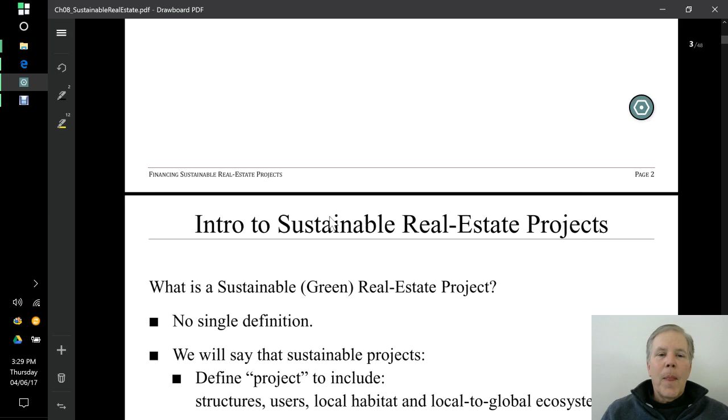First thing to know is that sustainable and green are synonymous. So what do we mean by a sustainable or green real estate project? Well, like many things in this life, there is no single definition. What we will say for the purposes of this chapter is that sustainable projects are defined to include structures themselves, users, local habitat, and local to even global ecosystem around our project.

Also, sustainable projects are going to consider not just economic issues, but also environmental and human health impacts of our project. And we want to measure all of these things over the project's entire life cycle, and that means design, build, manage, recycle. And then finally, green projects are defined to include aiming to achieve environmental and human health benefits while remaining economically competitive.

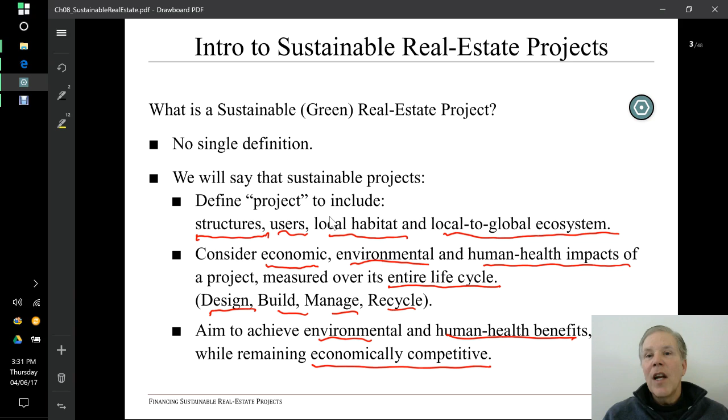Clearly, this is a much broader definition of what a real estate project is than anything we have encountered to date, and it's a much broader definition of a real estate project than has been traditionally considered in the industry.

So let's compare and contrast traditional to sustainable projects. If we look by project stage, which we often do, and we compare objectives for traditional projects and sustainable projects, we find in the design build phase, what's traditionally been looked at is trying to provide a great structure and minimize our construction cost.

From a sustainable or green perspective, the aim is still to provide a great structure, but now to contain life cycle costs while remaining economically viable, optimizing our environmental impact, and maximizing user health and comfort.

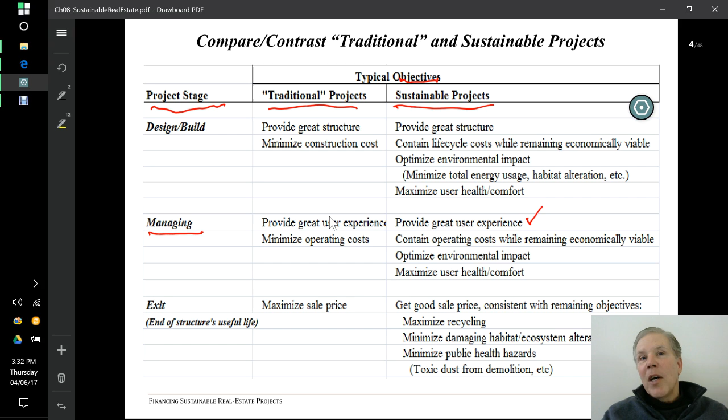Similarly, with managing of the project or operating a cash flow producing property, traditionally we've been looking at providing great user experience and minimizing our operating costs so we can maximize our NOI, et cetera. So we want to do the same thing from a green perspective in terms of user experience. But instead of minimizing operating costs, we're looking to contain operating costs while remaining viable economically. We want to optimize our environmental impact and maximize, again, user health and comfort.

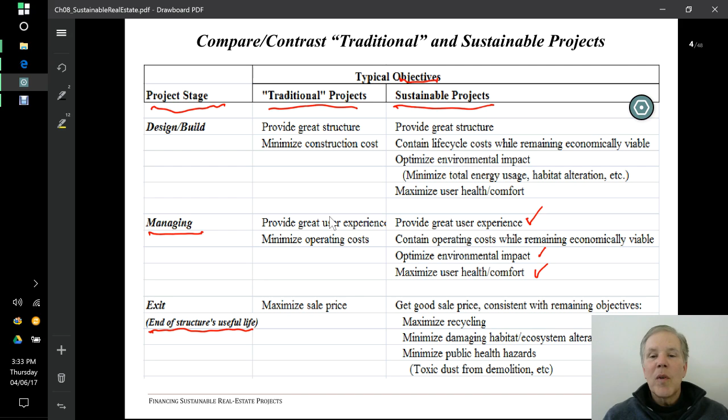And then finally, at our exit stage, which will be the recycling or disposal stage of the structure, we're aiming to maximize our sales price, what we can get for the land, the building, if it's going to be repurposed, etc. From a green perspective, that typically changes to something like get a good sale price consistent with our other important green objectives.

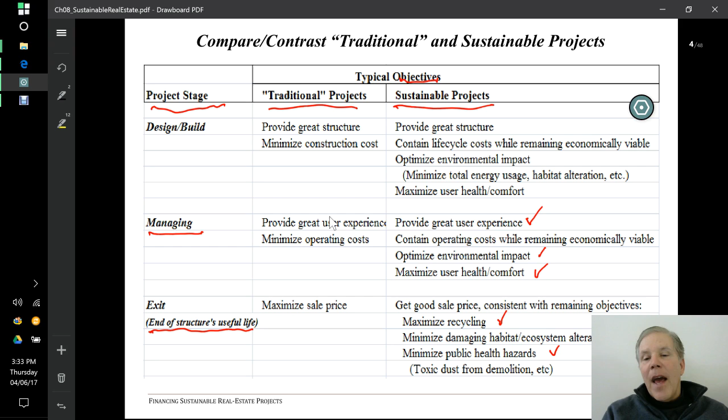Which are to maximize recycling, minimize damage to habitat around the building and the ecosystem around the building, minimize public health hazards that, as we all know, can happen from demolition, et cetera. So we have a lot more going on with green projects than we had with traditional projects.

The assumptions of sustainable projects are worth talking about. Underlying assumptions to green projects are that they should contribute to the public good. That's why we're not just maximizing our NOI, minimizing costs, et cetera. Also, that the public good is furthered by minimizing total energy use, minimizing habitat alteration, et cetera. And we don't accept the unquestioned preeminence of profit maximization. So it's a very, very different kind of perspective.

The implications of this is that doing green buildings is going to be much more complicated than doing traditional projects. It's going to consider much more than a project's economics. It's going to involve significantly more constituencies and design specialties, as we'll see. And it may or may not have compelling free market economics, which may not matter too much if you're a city building a city hall building.

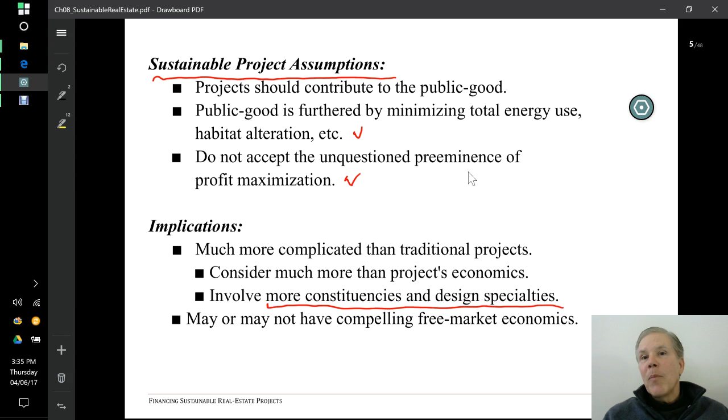You're very interested in the public good, much more so in some ways than the particular economics of building and operating a structure. An interesting feature of many sustainable projects is that free market economics over the life cycle of the project may be compelling, even for privately done green projects.

Usually our upfront costs, design build costs, development costs are going to be higher than they would be with a traditional project, but this may be more than offset by lowered operating costs from things like energy savings, reduced water bills, reduced electric bills, et cetera, and getting higher rents from better worker health and productivity.

We'll look at some data on that farther on. And also getting higher rents from simply the prestige of saying you have a state-of-the-art green design building.

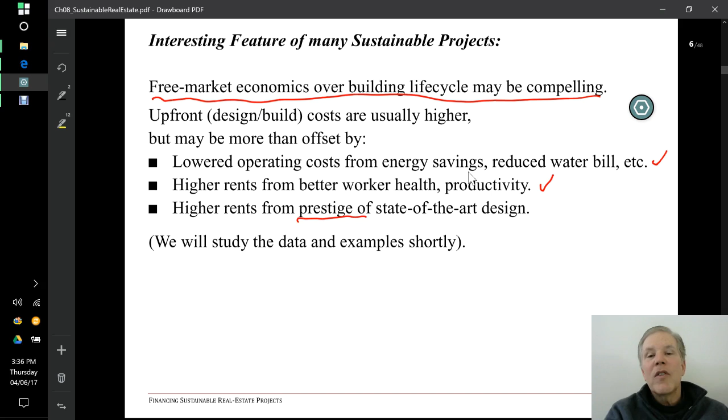So what projects are a good fit for a sustainable approach? Well, right up front, one that comes to mind for me is owner-occupied types of buildings, as opposed to design, build, sell, something like CAG did with the Apex Apartments when they were developing it with the aim to sell it right away.

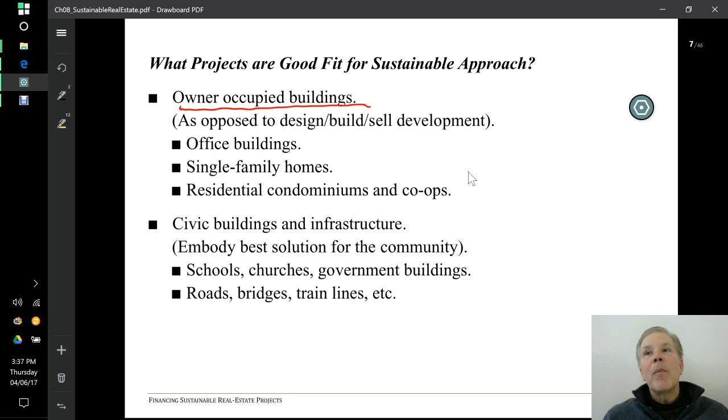If you're an owner-occupied building with something like an office building, a single-family home like your parents may have a mortgage on, a residential condominium or a co-op, in a case like that, even though the upfront costs might be more, you might be offsetting those because you're sticking around for a long time. And because it's yours, you may care more deeply about the environmental impact.

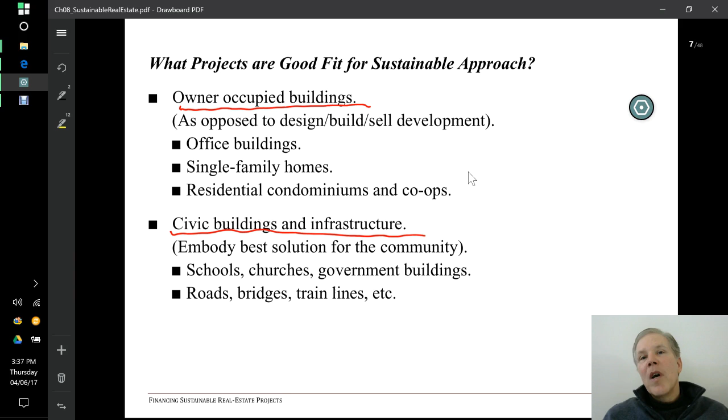Another type of project that's potentially a very good fit for a sustainable approach is civic buildings and infrastructure projects. We may think of things like schools, churches, government buildings, roads, bridges, train lines, etc. Here again, the importance of contributing to the public good may trump a lot of other economic issues and considerations.

So what's the corollary to that? What projects may be a bad fit for a sustainable approach? Well, if you've got a short-term ownership, something again like CAG getting into a project that they just want to flip very quickly, you're not going to realize any of the savings from having a high-performance building enclosure system or something like that. But you would pay an awful lot for that during the development of the project, so you might want to forego that and help increase your profit.

Buildings occupied by short-term tenants don't want to make the investments in green technologies that may take many years to pay off. Speculative and non-prestigious projects also tend to avoid this. Prestigious projects more and more like to include a green component in their marketing, a sustainable component in their marketing. Clearly, this is not so, at least not right now, for lower market, less prestigious projects.

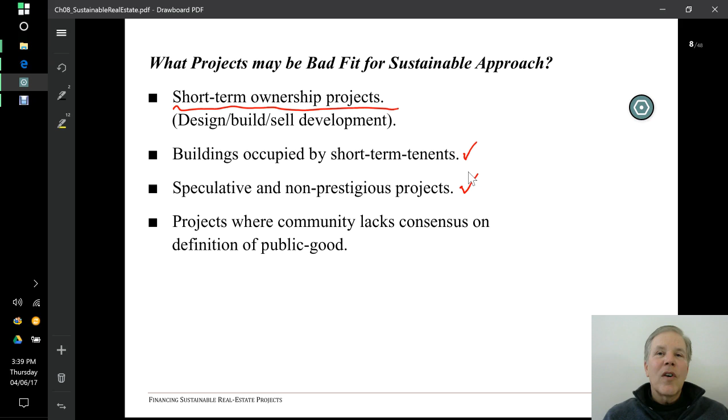Also, projects where the community lacks a consensus on what is the public good. I think you could say nationally right now in 2017, the United States as a whole, if you look across the country, has no national consensus on what does and does not contribute to the public good. And this can happen, of course, at a local level as well.

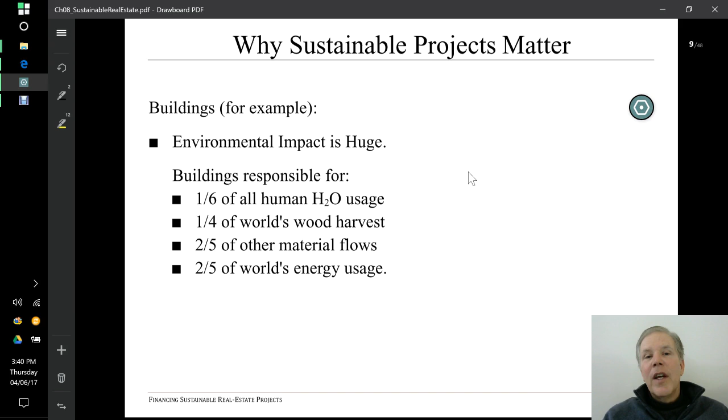So why do we care about green projects or sustainable projects? Well, I've already alluded to this notion of contributing to the public good, but let's look at some other things. If we consider buildings, the environmental impact of the buildings that we inhabit through most of our lives is huge. Buildings are responsible for, in the United States and other developed countries, 1/6 of all our water usage, 1/4 of the entire world's wood harvest, 2/5 of our other material flows, and 2/5 of the world's overall energy usage. So buildings have a very, very big impact on the environment at local to global scale.

The impact of buildings on human life and health is huge. Developed economy populations spend 80% of our time in buildings, so you want it to be good. The quality of building environments has been shown to materially affect the health and performance of its occupants. For example, 20% of traditional building office workers may exhibit sick building syndrome based on surveys of office buildings in this country. Workers in high quality building environments with high quality lighting and HVAC systems have measurably higher productivity than those in poor environments, based on studies done by Lawrence Berkeley Labs and others.

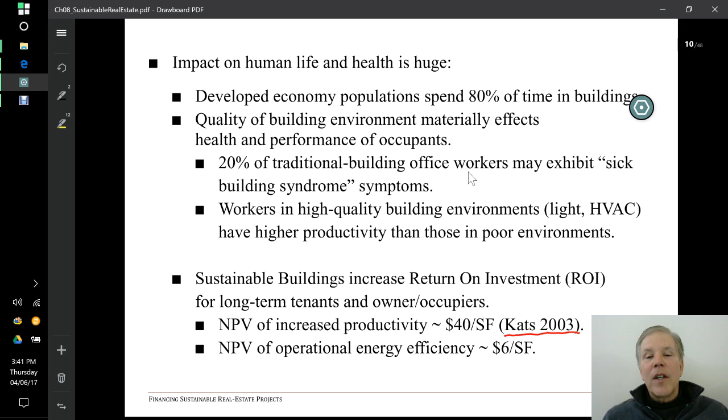Also, sustainable buildings may increase return on investment for long-term tenants and owner-occupiers. What do we mean by increasing return on investment? Well, for us, the way it's been and the way it's going to be throughout your careers in finance, you get a higher NPV from increased productivity of workers. There's a study done in 2003 that shows an increase of NPV of $40 per square foot with a higher quality environment in office buildings, and the NPV from operational energy efficiency increases, on average, by about $6 a square foot. So the impacts are material and interesting, non-trivial.

So what's going to be our framework for sustainable design? What are we going to use to be able to assert that we're following sustainable or green design practices, and how are we going to measure them? Well, in the US and around the world, the leading body that creates, promulgates, manages and measures guidelines for sustainable design is the US Green Building Council, commonly called around the world USGBC.

It is a nonprofit trade organization, and I think that's something to think 2 or 3 or 4 times about. A trade organization means that its members are made up of for-profit entities that are in the built environment business, real estate business, or something else related to the built environment.

For example, GAF is a manufacturer of roofing systems. Nucor is a manufacturer of steel truss systems for buildings. Lennox, a very large HVAC provider. Kohler, very large water systems and water fixtures designer. Autodesk, design software. PPG, glass and enclosures. You get the idea. So all of these folks may have a big conflict of interest in actually creating, promulgating, and managing the use of guidelines. And you could think about that a little bit as to why they might have a conflict of interest.

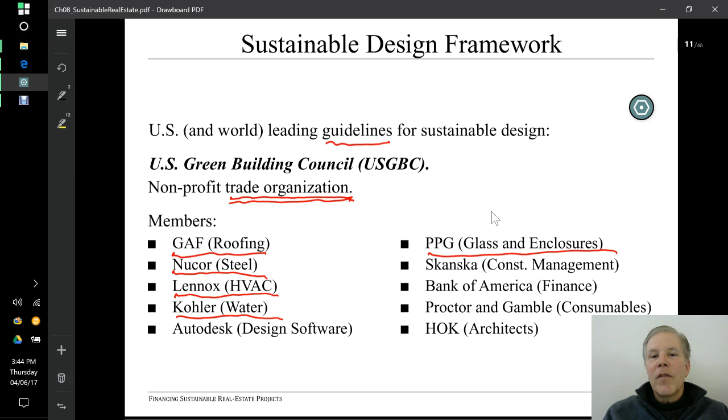So the USGBC created and maintains green building standards called LEED. Again, LEED standards are used throughout the world.

LEED stands for Leadership in Energy and Environmental Design. This is a set of rating systems for designing, building, and operating green buildings and even neighborhoods.

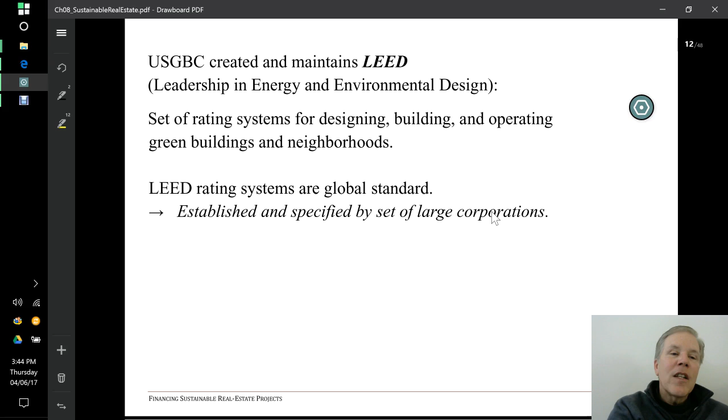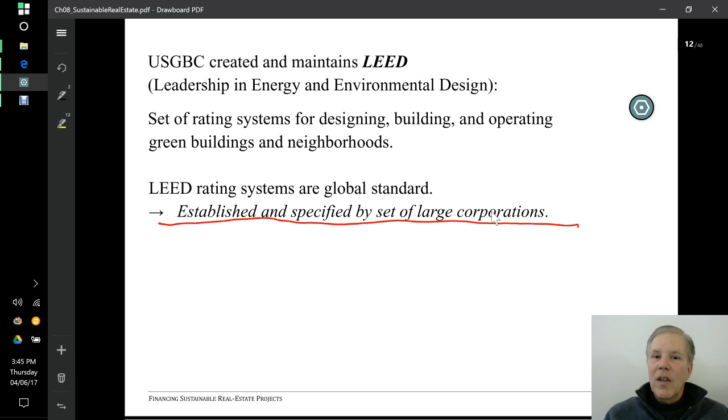As I've indicated, LEED rating systems are the global standard. And again, they're established and specified by a set of large corporations who are in the built environment industry, whom I would argue have a vested interest in creating standards that promote the use of their systems, materials, and technologies, which I don't think is a good thing. That's just me. Welcome to your own opinion.

So what are the LEED categories for green design and building management and conversion? First, green building design and construction. It includes new construction, what they call core and shell, which we would call gut rehab, schools, retail, new construction, and again gut rehab or major renovations, healthcare.

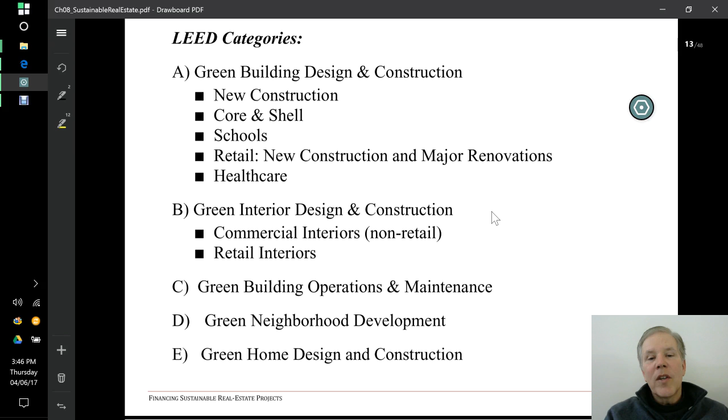Second, interior design and construction, commercial interiors, retail interiors. Third, green building operation and maintenance across all building types. Green neighborhood development, green home design and construction. And they actually have a couple others, which you can look up on their website.

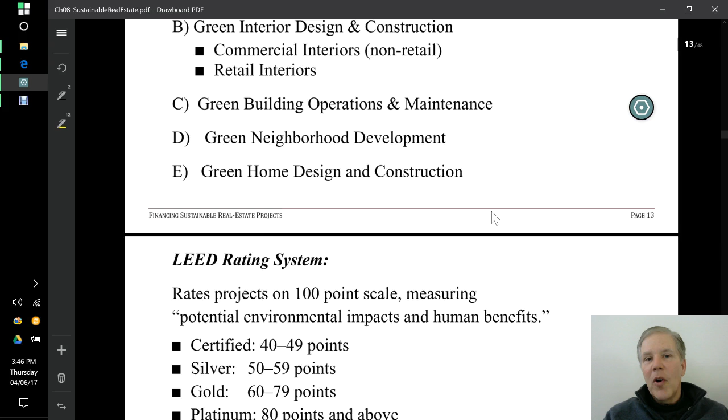They have a rating system for LEED which applies to all of these categories. So if you're doing something in a given category, let's say building design and construction, new construction, the most points you could possibly get is 100 for this project. And you're going to get points by having potentially beneficial environmental impacts and human benefits as defined by this trade group of large for-profit companies in the built environment industry.

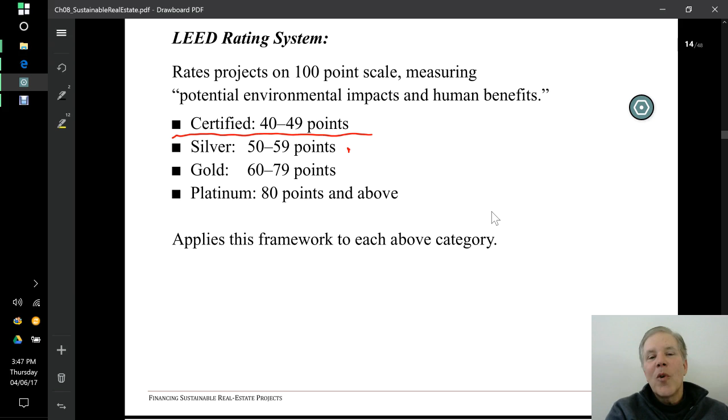So you can become certified for LEED by getting 40 to 49 points. That's very easy. You can get what's called silver status with more points, gold with more points, and platinum, which is as high as it goes with 80 points and above.

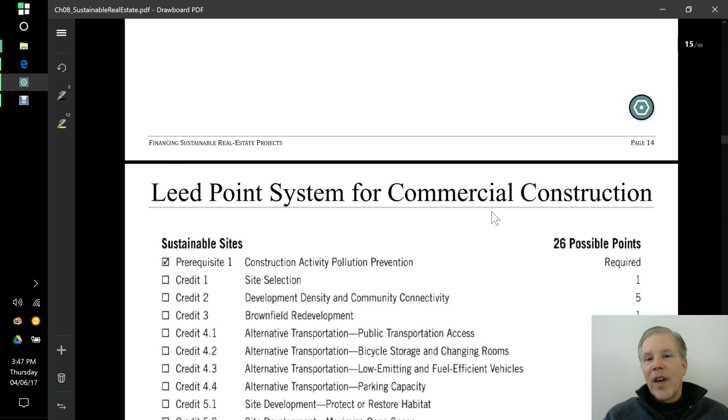I'd like to go over with you just quickly - you can look at the details for this rating system for each of the categories at the LEED website. I want to go over one of them with you now. Let's say you were doing a commercial construction project. Here's how you would rack up points on the LEED system.

You have to meet anything that says prerequisite, and other than that, you just check what you've done. And it does get inspected, and of course, to be a LEED inspector, you have to be certified by LEED, and that brings more money to the USGBC, getting fees for people who are becoming certified, et cetera, and adds to the cost of the building to get this type of inspection.

All right, enough of that. So site selection - how do you know if you have a good site selection? Well, you got a LEED trained architect to make sure that you do.

Development density and community connectivity - so the USGBC folks have some a priori ideas on what is appropriate density and community connectivity, and you have to fit yourself into that. Brownfield redevelopment, that's, I would argue, probably a good thing. You may disagree. Alternative transportation, public transportation access, et cetera.

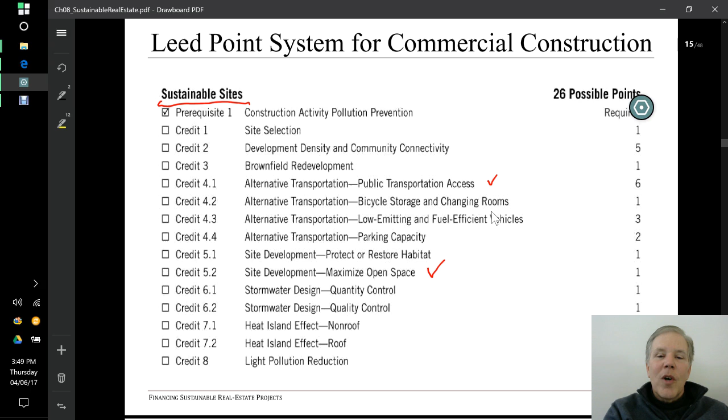Site development, maximize open space - so they're presuming it's good to maximize open space. If you've walked through Greenwich Village, you might want to take issue with that. And you want to look at things like heat island effect, light pollution reduction, et cetera.

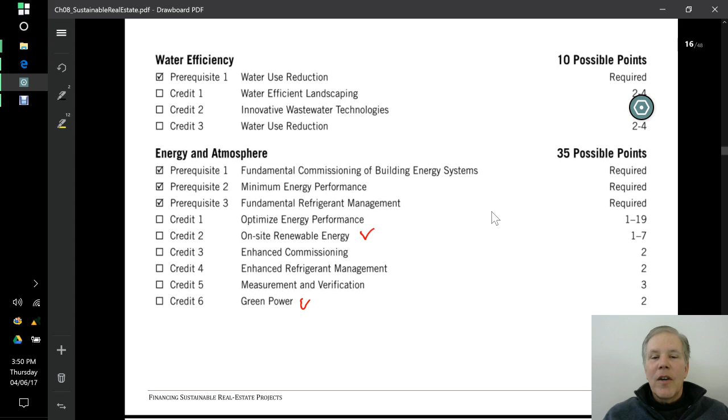Then you can get more points from an energy and atmosphere perspective. Your minimum energy performance, which probably everyone would agree on to a certain extent. Your refrigerant management, optimize your energy performance, on-site renewable energy - so they're presuming that's always a good thing. Maybe using natural gas might be better in some circumstances, but not as far as LEED is concerned. The measurement and verification and green power, I'm not sure how that differs from renewable energy.

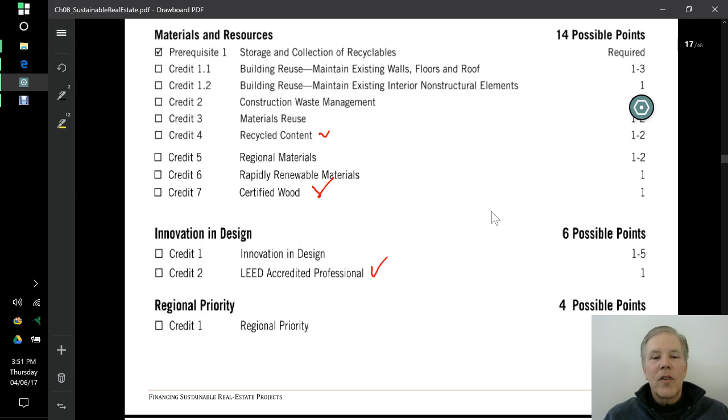Innovation in design, innovation in design - I should have pointed out that some of the country's largest architecture and structural and environmental engineering firms are part of the USGBC. So how do you get an innovative design? You get one of these fancy architecture firms and pay them a lot of money for their design in some way that they know it will be called innovative, and having LEED accredited professionals going through your whole design process. Then regional priority, et cetera.

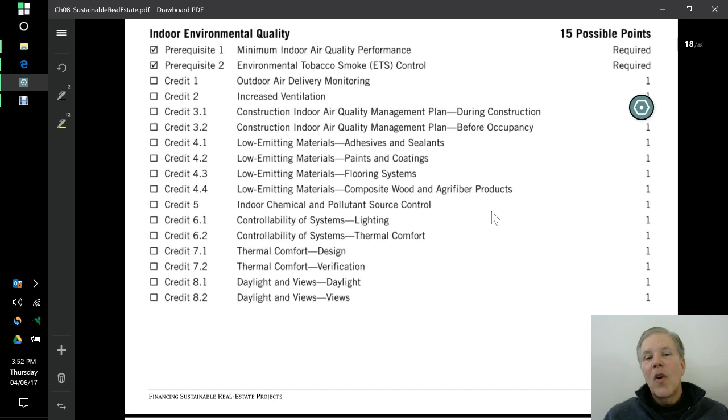I'm not going to go through every one of these, but my point here is that some of these things I think we could all agree on, and some of them seem to be subjective and arguable. There could be other perspectives on them, and I think that the perspectives put forth here are put forth by companies that have a vested interest via selling their design services or products or technologies. That's just me.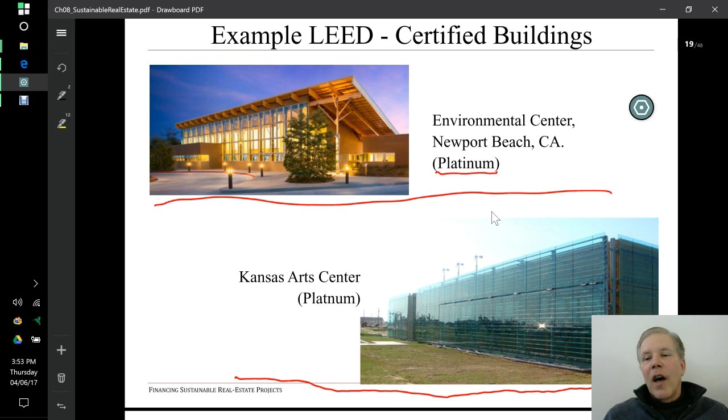Okay, let's look at some example LEED certified buildings. Up on top, we have an environmental center in Newport Beach, California, with platinum certification, as high as it gets. And we have a Kansas Arts Center project, also platinum. You'll notice both of these buildings are for high-end uses, and both have a double glazed facade, which has, in my view, based on the physics, marginal energy mitigation benefits, but definitely doubles the cost of the glazing, which makes PPG and companies like that very happy, and also the architects that get to do a fancy design.

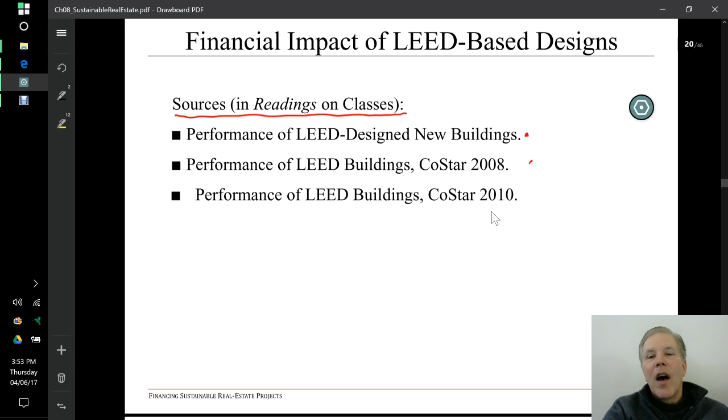Okay, what is the financial impact of LEED-based designs? Now we're bringing this right into real estate finance. The sources for everything I'm going to talk about in this section I'll put in the readings section of classes, and they are mostly coming from performance of LEED design new buildings, CoStar study of 2008 and 2010.

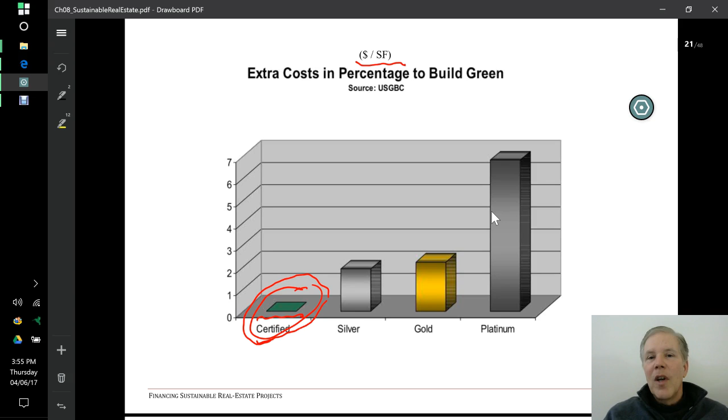The certified level is interesting because a lot of developers with luxury buildings, Class A office buildings, like to say they're LEED certified. If you go through carefully everything required to be just LEED certified, it's not much, and that's why it doesn't cost much. However, most people out in the real world don't know that, and LEED certified sounds good to them, so developers like to extol that, even though it doesn't really mean very much.

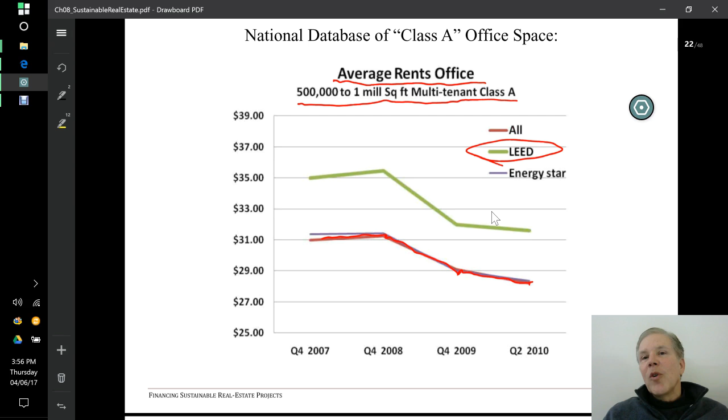Okay, if we look at a national database of Class A office space, and average rent for offices of 500,000 to 1 million square feet—these are big, big things, like buildings in Manhattan—you can see clearly the rent per square foot crashed in the Great Recession and continued going down after the end of the Great Recession. But the really interesting thing is that LEED buildings had higher rents, Class A, top end of the commercial scale. They had higher rents to start with, and they maintained those higher rents through the Great Recession and beyond. So that's pretty interesting for you as prospective developers.

Also, a word on the Energy Star system. The Energy Star system is very much like LEED, which the Environmental Protection Agency tried to put together for folks to use instead of LEED. It never caught on, except with maybe a couple professors here at NYU and a few other places, but it's just not used very much out in the real world, and it never had much meaning to people renting commercial office spaces, because you can see the rents obtained from Energy Star certified buildings are effectively exactly the same as traditional buildings.

Okay, now let's look at what's called energy use intensity, which is measured in thousands of BTUs per square foot per year. If we look at average US commercial buildings energy use intensity, the national average is 91,000 BTUs per square foot per year. LEED certified buildings, a lot less, 67, and for LEED gold, a lot less than that, almost just 50% of the national average.

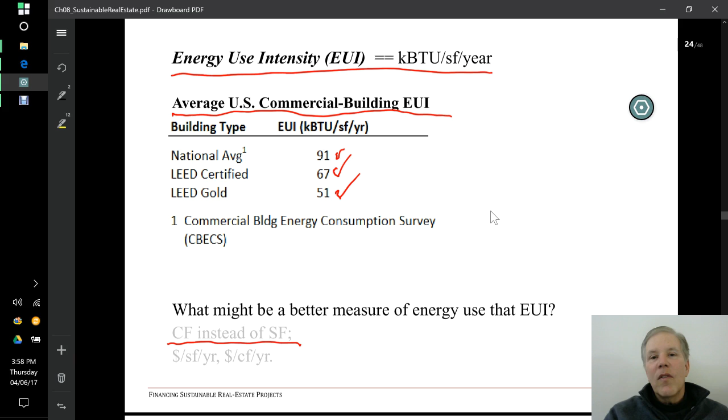This is interesting. It might be better to use cubic feet instead of square feet, which would account for double height spaces, tall ceilings, things like that.

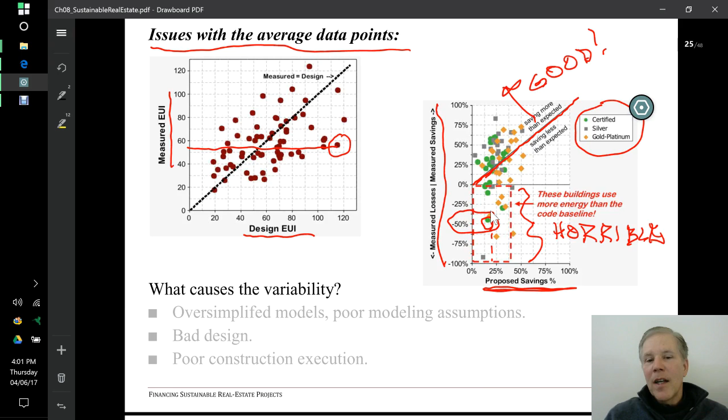So these average numbers are not good. You've always got to look at the spread. And the other thing I would say is that a lot of times proposed LEED items do not get measured afterwards, and a lot can happen between the lip and the cup. And if a building is not constructed properly, even though it's supposed to have great savings, it might not, okay?

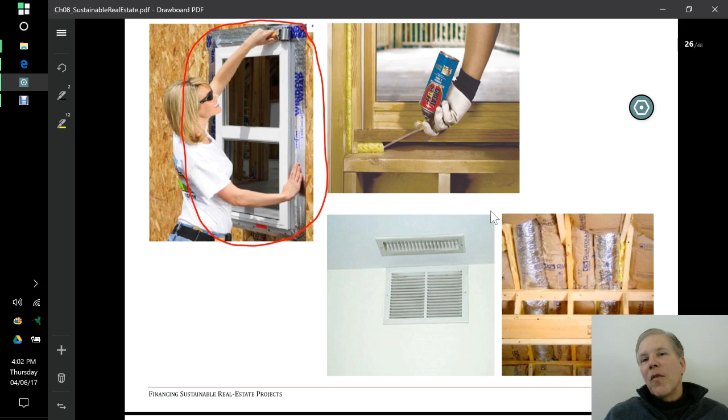Just a very, very simple example. Convective losses, drafts coming in and out of buildings, are probably the biggest single loss for most residential buildings and most pre-1980 multifamily rental buildings. So if something like this doesn't happen, you're going to have very big convective losses, and your actual performance of your building is going to be nothing like what you claim in your design that it should be. Same sort of thing here.

You could use either this or this to get your solution here. So here's an example where we have the treated air coming in, and this is actually a return. So stupid things like this happen. So the conditioned air, which is of course also heated and cooled as well as controlled for humidity, never gets into the occupiable space. It just gets pumped in and goes right out the exit.

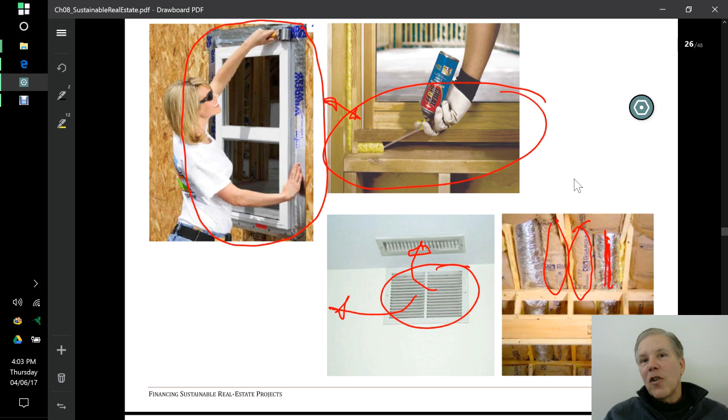Also here we see an example, this foil-faced insulation. To provide the insulation that it claims it does, it needs to have the foil on an airspace facing the inside. And you see that's not done consistently here. So a lot of things like that can happen in the real world to make the actual performance of your building much less than your mechanical engineer, your HVAC engineer, is going to claim.

Okay, here's another thing which is pretty interesting and useful. It shows users' perceptions of building performance, okay? Red is the average of all the buildings in the BUI database, and green is data points from a set of LEED certified buildings. And I like this graph a lot because it shows you all the data points, not just the average for the LEED certified buildings.

Okay, so as far as acoustics, you see big spread with acoustics, but not really much change over the average. In terms of lighting, looks to me like a very clear benefit here. The average would be something like that, but clear benefit to LEED. With temperature, I'd say we have something like the average here, probably not a statistically significant difference. With air quality, clearly a very big benefit—all the data points are above the BUI average, and the expected value is well above that BUI average.

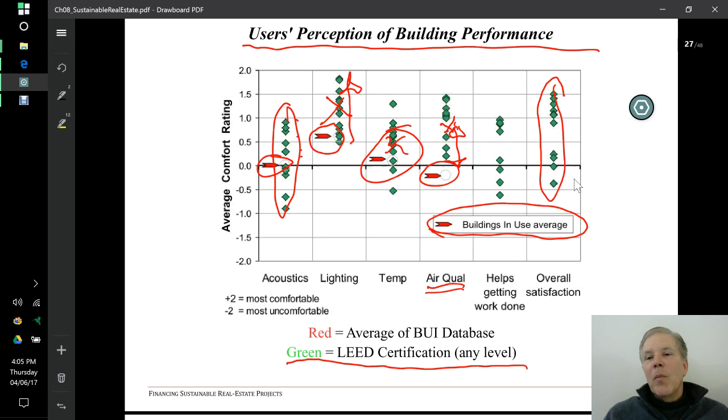Helps getting work done? I don't think so. And overall satisfaction looks to me like there definitely is some overall satisfaction. It may be from the placebo effect, it may not, but nonetheless, it's there—some overall satisfaction from LEED certified buildings.

Okay, so next up, what we want to do is consider the economic value of LEED-based designs. And we want to be able to do DCF-based valuation of LEED-based design, just as we have done for traditional design, build, sell, and manage and sell properties. And even we haven't done yet, but we're about to, design, build, manage, sell properties. So what are we going to do? We're going to use the NPV method. We're going to get, for the sponsor, the net comprehensive cash flows for the whole project, design, build, manage for a number of years, and then recycle the property or sell the property, something like that.

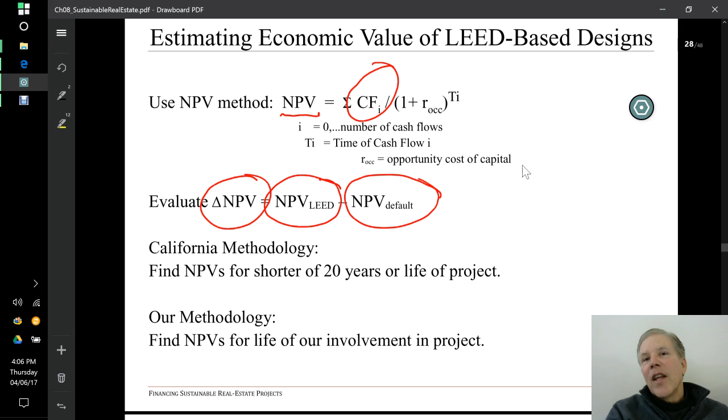And our approach is going to be that we will go ahead and get an NPV for LEED and an NPV for traditional construction. And then we're just going to subtract the NPV for traditional construction from the LEED NPV, and that'll be our delta NPV. And that'll be potentially a big selling point for doing this project. Again, this is going to work best for folks who want to design, build, and manage and operate a building for some time. So that's the type of project we're going to look at.

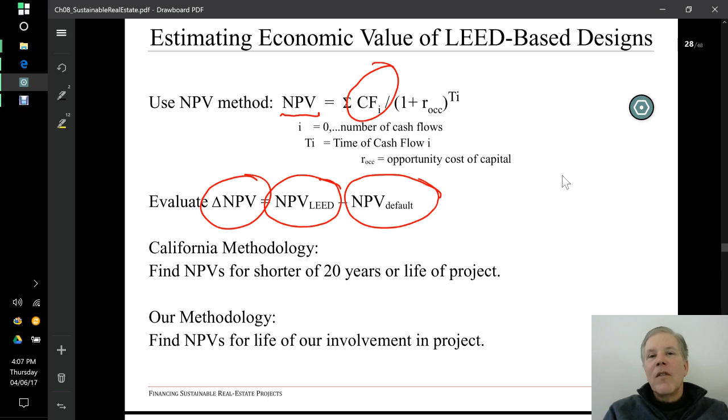And I think this is a good place to stop, and we will pick up with this very interesting quantitative analysis in our next session. So see you soon.